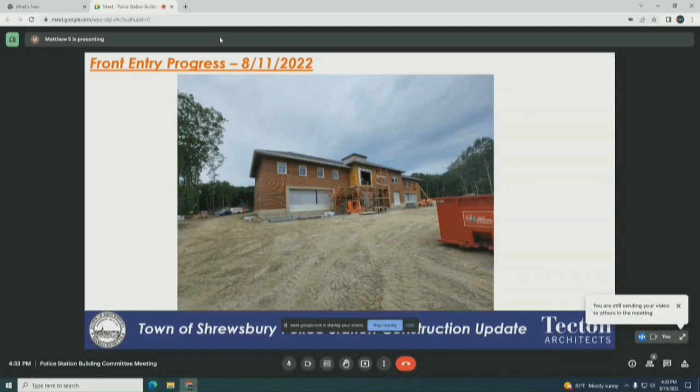Pretty much a majority of the windows are in on the front. That one window at the front of the building that's still exposed spray foam will be the last to go, so they can utilize that opening for loading to the second floor.

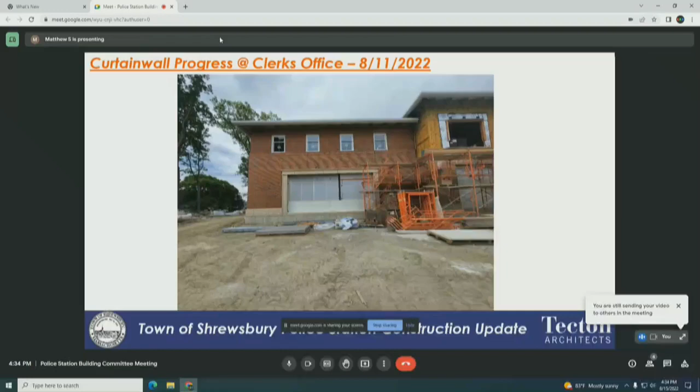Zooming in closer, you can see the main curtain wall outside the clerk's office is being prepped and readied for curtain wall installation. This was Thursday; there's been a lot of progress on that opening since then. You can see the ballistic liner panel on the lower portion that gets covered by metal panels, and the ballistic rated glazing above that. They've put in several framing members today, and that'll continue through the rest of the week. Over the next week or so, you'll see those last windows going in, and we'll get pretty close to finishing that up.

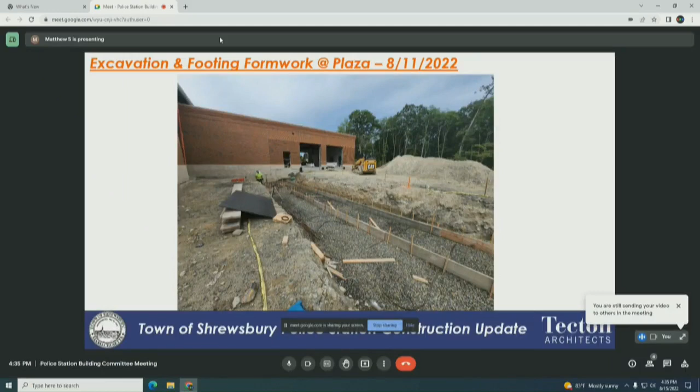Additional site work is going on now, with preparations for the finished site work ongoing. This is the plaza off to the back, where they're forming up footings for a small retaining wall between the training room and the sally port, where the fallen officer memorial will be installed. That was Thursday; today they were finishing up the rebar for that, getting ready for the concrete pours, and Allied Testing is scheduled to take samples of that concrete once it goes in tomorrow.

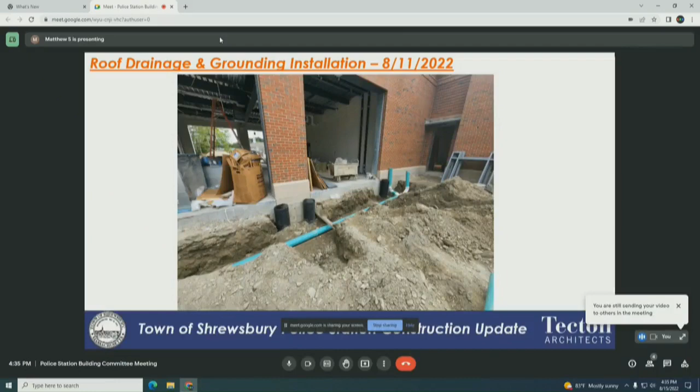This is around the other side of the sally port, where they're starting to tie the building in with the utilities—stormwater connections up to the roof drainage systems and the leaders that go up to the downspouts. Also, the building ground ring was being installed; there's a little exposed copper you can see in front of that drain piping, which is the ground ring that goes around the entire building to tie into the lightning protection system.

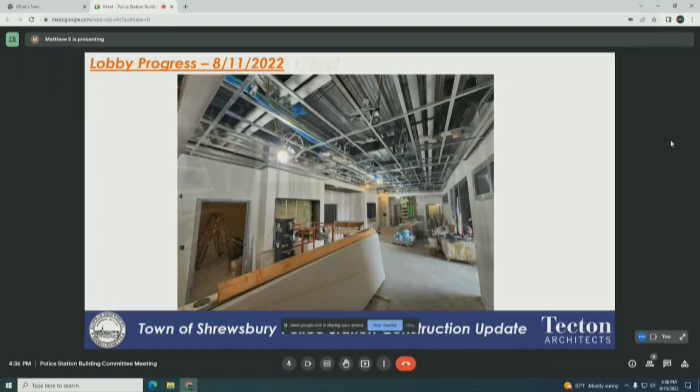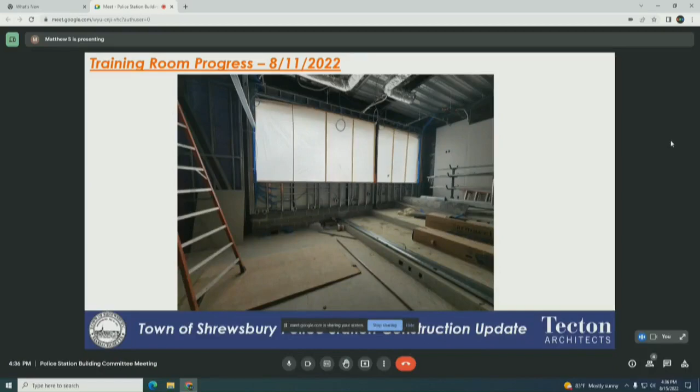So this is being drywalled as we speak, and we'll continue to get closer to completion. Some of the drywall ceiling components and soffits are being framed in now as well.

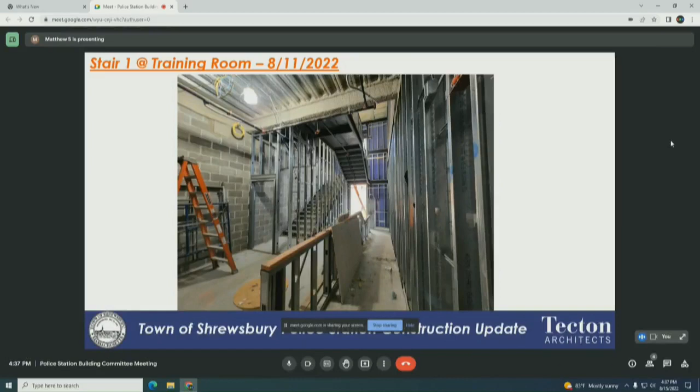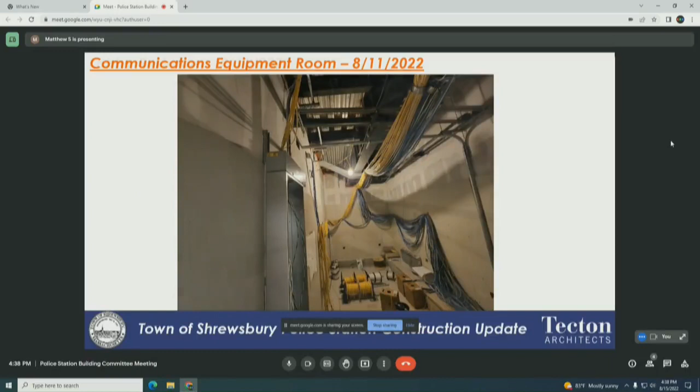Basically, all of the public bathrooms and unisex bathrooms on the ground floor have been tiled. They had just one bathroom off the lobby that they were grouting, probably tomorrow. They were just cleaning up their spacers at the end of the day today.

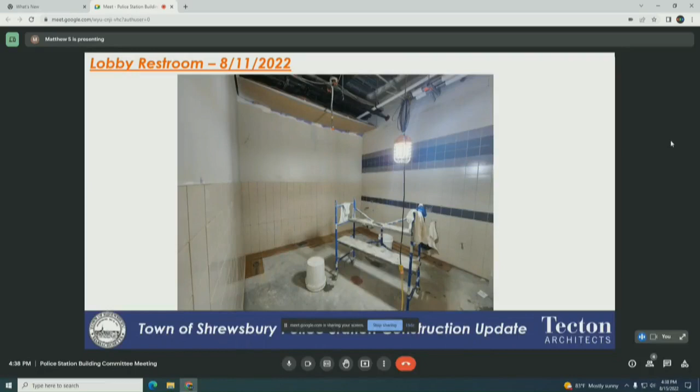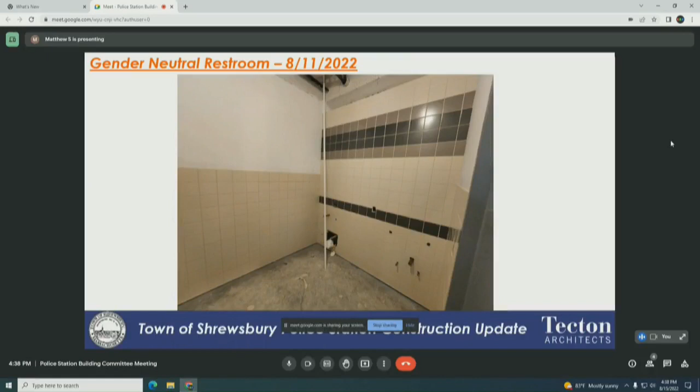And this is one of the restrooms that's complete, so it's pretty much ready for floor prep and flooring, and then fixtures and accessories. So we're getting pretty close to finishing out some of these spaces. It's good progress to see.

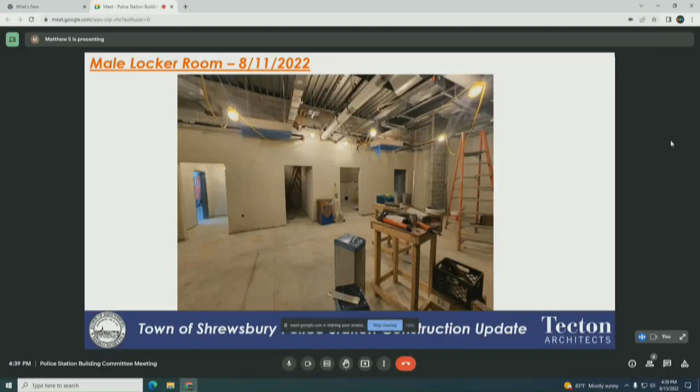This is the next area that they're prepping, the locker room. They've skim coated the walls that are yet to receive tile. You can see some marks on the floor - they're coordinating where the lockers are going to be installed, because that ties into ceiling soffits and return air plenums. So they're just starting their layout work in there and getting that all prepared, getting ready for tile as the next step.

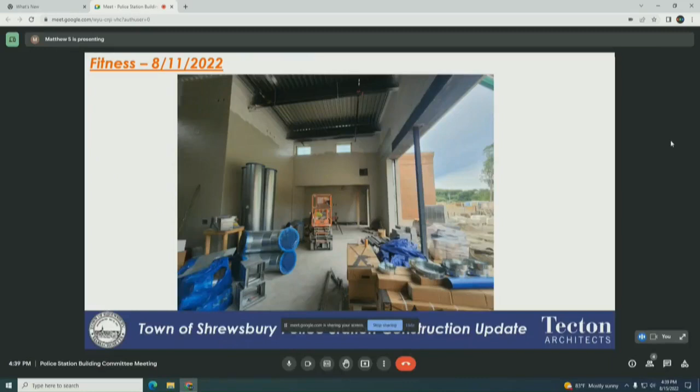We actually just got a notice from the training simulator that they had a final survey just of room readiness for them, so we're coordinating that and returning it back to them so we can get a confirmed ship date on that material.

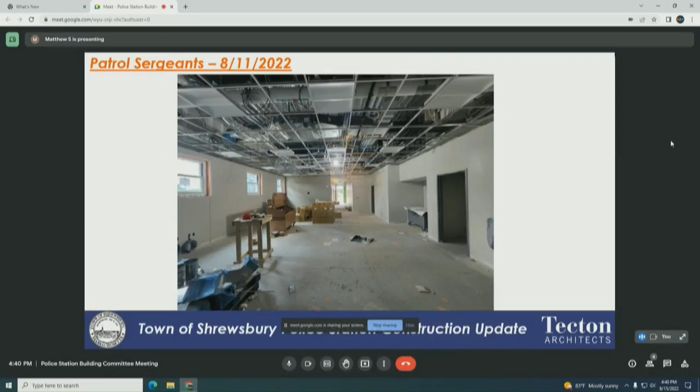And then towards the back of the building, these are the patrol sergeant spaces. First coat of paint is done, windows are in, ceiling grids in, a majority of the light fixtures are in, and some of the devices and things like that are going to be installed in the next week or so. I think they're expecting middle of this week or early next week the first shipment of acoustic ceiling tiles, and they'll pull those out where devices will be installed and just install those device locations before they flood the entire ceiling. So these are going from pretty rough and raw spaces a few weeks ago to really being finished out and getting ready for final fixtures to be installed and completed.

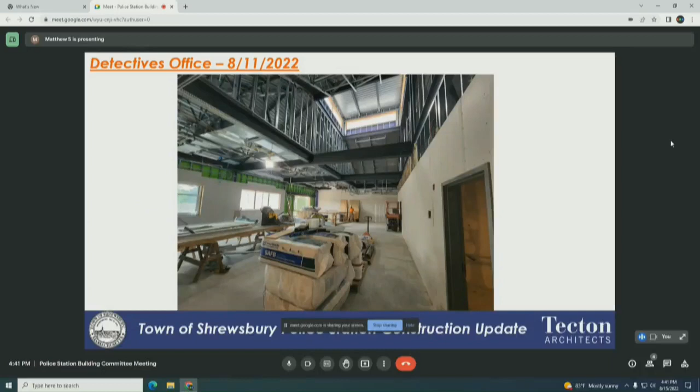Detectives, so we're up on the second floor now. This was pretty much just open framing a couple of weeks ago, and you can see that since we last met, drywall's going in. This is one of the largest spaces in the building, so there's quite a lot of work to do in here. Soffits are being coordinated and framed out around structural steel, and all the architectural elements will start to tie together once the drywall is finished.

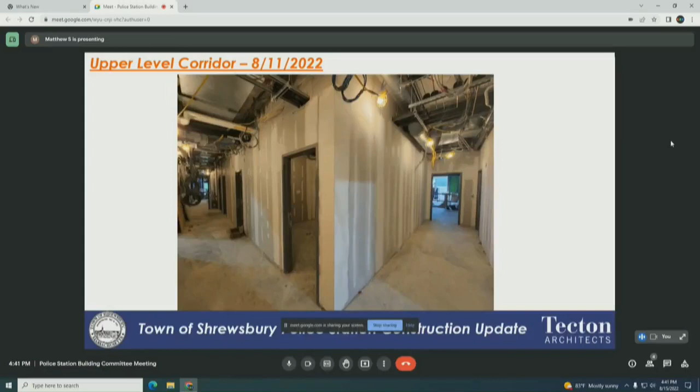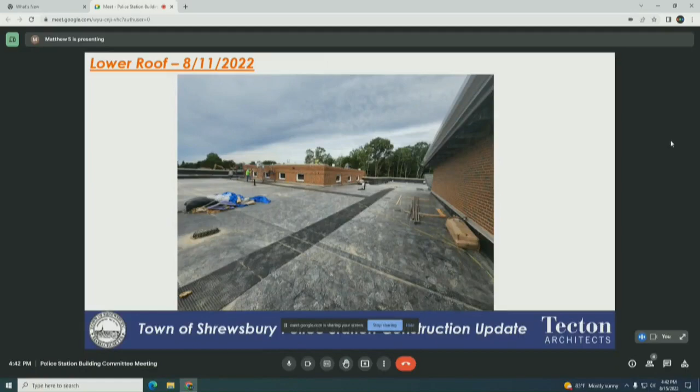On the roof, a lot of the exterior walls that tie into the roofing components with flashings and things like that are being completed. Masonry on this part of the building was just being completed when we were up there. They were just installing the last pieces of the precast caps that finish off the fitness area in this photo, so that's one of the last pieces here. And then they can just finish the soffits, and there's a couple areas where we have metal panels.

And then looking out towards Maple Ave, if you've driven by, you can see the fenced off portion of that. There's sort of a Half Moon Plaza where there's the bus stop and everything right there. So that's just getting graded out and prepped.

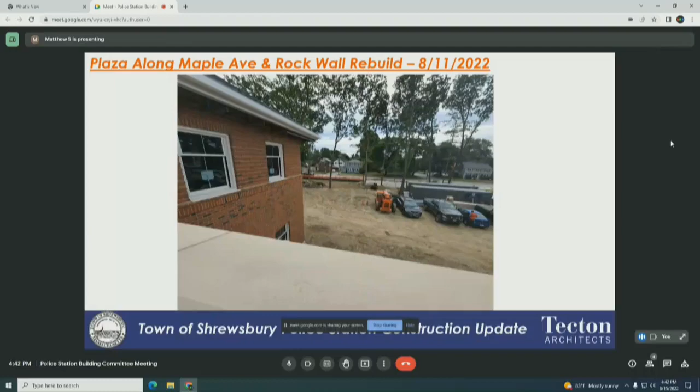Have you guys started the wall rebuild yet? No, there was a delay on the project that crew is coming off of, so they should be on site Wednesday. So they're going to start that stone wall rebuild, and then once the stone wall's done, they'll build it up to the subgrade for the pavers in that area, and they'll install the pavers at the same time.

And that's pretty much where we are. I would anticipate over the next month or so, the exterior envelope will continue to finish. And the interior finishes will continue as well, and we'll be getting really close to finishing out spaces and getting room by rooms complete.

Questions? Mo? Evan? No? All right. I just had one question.

The parking canopy with the footing needing to go to a deeper elevation. Can you just explain that, just so I understand it?

Yeah, we can. I think we can get into that when we discuss the change order. Yeah, that's coming up soon, once we get the change order number. It triggered me when I saw the picture.

Understand. I just have one very general, broad question. A lot of progress, it looks like, since the last time we met. Would you say we are on schedule, ahead of schedule? What's the timeline look like? We still right on schedule? Yeah, I'd say we're doing well with everything that we've worked through in the past year. There's a lot of work to be done, but I still see a path forward to get it here end of November. Okay, great. Excellent.